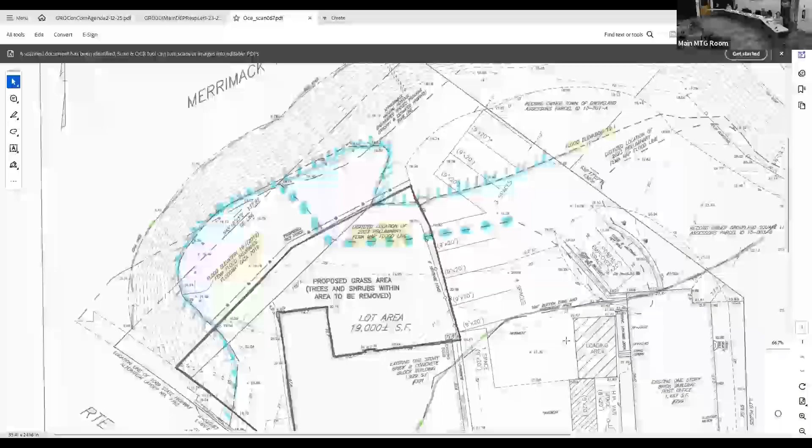So shown in red here is our area - sorry, I lost my cursor somewhere. The red area is the proposed area of trees and shrubs to be removed. This is part of our proposal to clear the area adjacent to the rear of the building and apply grass seed. We want to keep this open for access purposes and to allow sunshine to reach the building so it doesn't get all mossy.

With regard to our response to the DEP comment that the preliminary FEMA line should be applied to our plan, the dotted line here, cutting off this little triangle, was our original Zone A elevation at 19.1, and it just goes along the top of the bank there. When we digitized the Zone A from the preliminary FEMA plan, it did come up a bit further - you can see this blue dotted line, and it came up quite a bit.

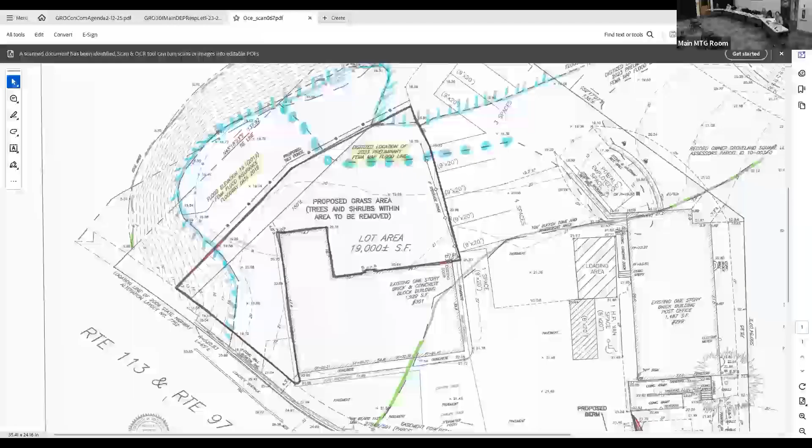That's the small triangle by the road there? Yeah, yes, this little triangle enclosed in red ink. Libby, could you describe that a little more? Because I'm pretty sure there's a handicap ramp right where that triangle meets the building. And is there a sidewalk there too? How do you plan to have a berm in those spaces?

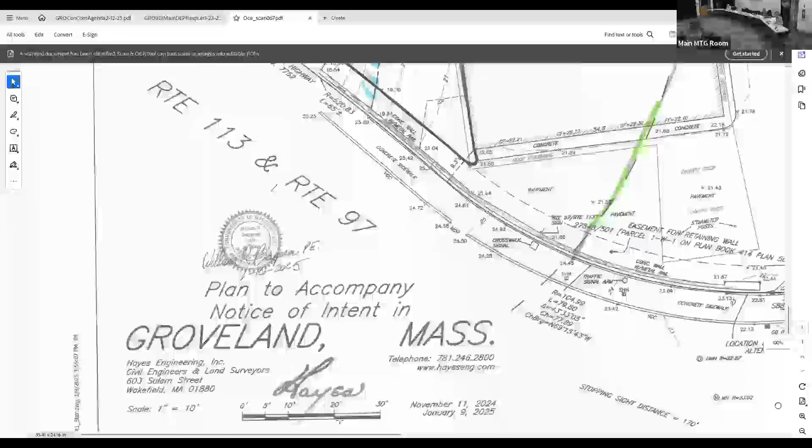See if we can focus in on it. So the area we're looking at, there's an area of gravel and grass just adjacent to the sidewalk. This is the sidewalk here next to the street. And then you have this little area of grass and stone that's adjacent to the flagpole. The ramp I think you're talking about is a little bit further in.

So I don't believe we're affecting that. It says concrete ramp there, but the entrance to that is where your cursor just was, to the right. So I'm pretty sure somebody coming from the parking lot to use the handicap ramp needs to go through that little stretch of gravel between the grass and the concrete ramp, where you have a little bit of berm there.

So I can clarify. What you have is a line that's been established by the DOT from the point of the handicap ramp out to the control joint in the sidewalk. They're suggesting a berm go in up to the sidewalk for the handicap ramp, which was 18 inches at the sidewalk by the street and goes to nothing at the ramp. So you're talking probably a distance of about 3 inches that would be impacted, if any, at the sidewalk. And I don't think the sidewalk will be affected at all.

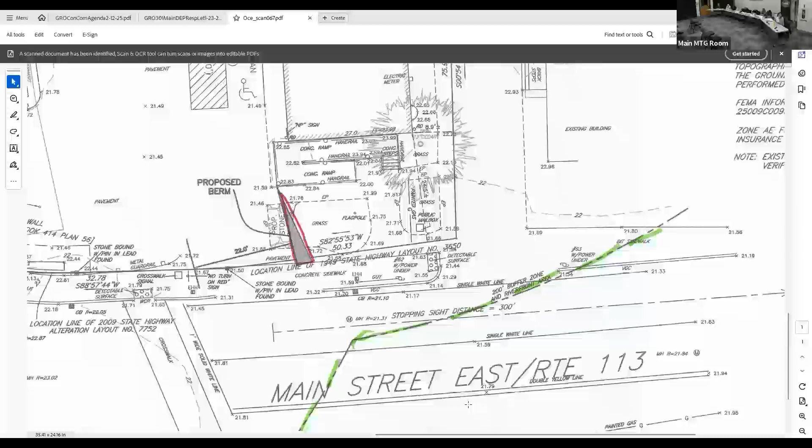So you did get a, I forget what it's called, a traffic study, you mean? Yeah, because I thought the DOT found this problematic last time. Yeah, but then they were supposed to apply for... let's see, where is it? We've got approval from the DOT, it's been submitted to the planning board, and it's been registered.

At the end of the day, we're wetlands and flood zone. I get you have a good point, they shouldn't screw it up, but if they mess up the handicap access, I would believe that would be a planning board issue. Maybe we could move the post office building then.

My only concern, and I brought this up last time, is whether water will flow differently if that berm catches it or something like that. That would be my question. Right, because it's all impervious.

Is it really a berm, or is it more just extending the parking lot? It's basically removing the grass and putting in a gravel type area for car traffic to go down, so they're not driving over the grass. It's just changing the line.

If you look at a picture on Google Maps, which is 5 years old, the grass basically doesn't grow for the first 2 feet on the edge of the driveway because people are driving over it. So my guess is they're not really doing a berm - in my mind a berm means some sort of elevation. That's what I was thinking, like a wheelchair trying to get over that. I don't think they're really - it seems like you're just hot topping, trying to do a separation point between the grass and pavement. Right, okay.

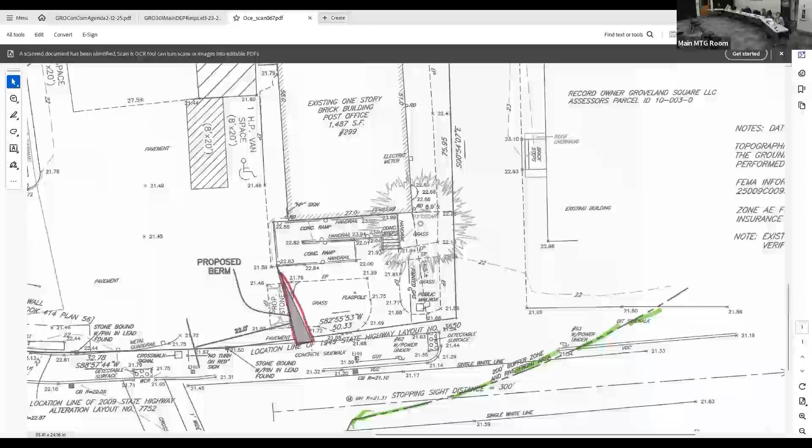Any other questions on this part of it from anybody? I apologize, I wasn't here at the last meeting - where's the north-south? On the northwesterly corner of the red area indicating where the grass is gonna be, in the back of the building, you have that extending over the riverbank. I assume you're not filling that, that's just an area to say here's the area we're cutting the shrubs and whatnot?

That's correct, we're cutting down the shrubs and saplings that are in there. What we discussed last time was that we wouldn't take out the entire trunk, but just cut it to the ground and leave the roots. Right, okay, thank you. And then when we put loam and seed on there, that'll be covered with a blanket or jute netting or something to stabilize it.

So we're actually putting loam on that slope, just enough to cover the stumps. How do we all feel about that? I feel like it's gonna end up in the river if it rains. They said they were gonna put a mat blanket down, so if it grows quick enough, it'll be stable-ish. That's a very steep slope there, though. It's practically a cliff.

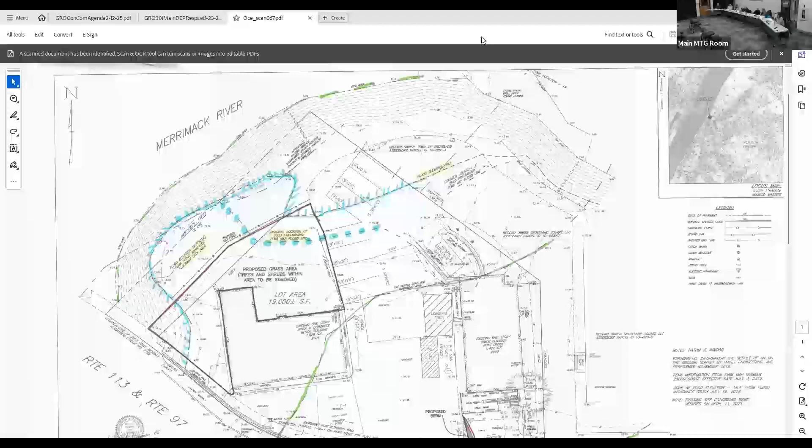They're Norway maples, we established last time. I did take a couple of videos that I sent to Libby, and I think she sent them in, that showed the week before the walkthrough was supposed to happen, showing where the old Mirafi barrier actually is and the area we're talking about. We're not changing grade or elevation, we're just trying to scratch it off, take down the saplings that are filtering up, get rid of the honeysuckle, the Japanese knotweed, the invasive stuff, and put some hydroseed down to keep it under control. Then the intent is to keep it mowed regularly and maintained so it doesn't come back again.

I would still like to go have a site visit personally. I don't know what a Mirafi barrier is. It's the old silt fence that was there from the last time - it's knocked down, laying on the ground, and it's pretty much the same perimeter we're dealing with at this point.

That's more than 5 years, isn't it? It's more than 5 years since this thing has been going on - no, since the silt fence was put up there, probably. It just feels like it's been a while. Well, that went up when the remediation was going on, right? I don't know whether it was done then or after that. That was done after that, Terry. The silt fence went up after the remediation? Yes. That seems backwards. No, the cleanup took place about 10 or 12 years ago. Yeah, I guess that's what I'm thinking of. That was all just once they took the tanks out, then it was inside the buildings, they had the pipes. Anyway, we're drifting.

So the problem is the snow on the ground. All we can do is schedule something before our next meeting, which I'd propose as late as possible, Saturday March 8th, and hopefully the snow will clear because right now you can't really see it, and it's difficult to get an idea. I don't know if you saw the video - it's fine, but it doesn't really give you the bigger picture of the site and the steepness of the bank, which I'd like to see. So I'd propose we schedule a site visit for Saturday, March 8th.

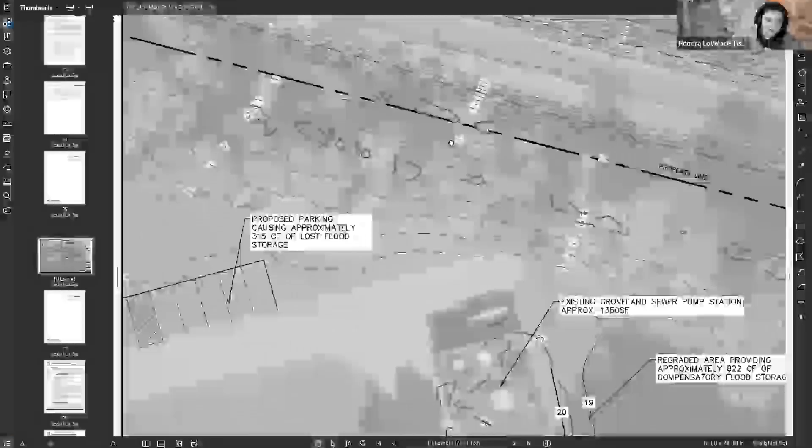Where's that map? Here it is. So here is where the regrading of the area right here would just increase the flood storage back here, so not just doing a big ditch, but just kind of smoothing some of this down. Yeah, it's pretty swampy back there. When they mow, there are times after rains where you can see 4-inch deep tire tracks from the lawnmower.

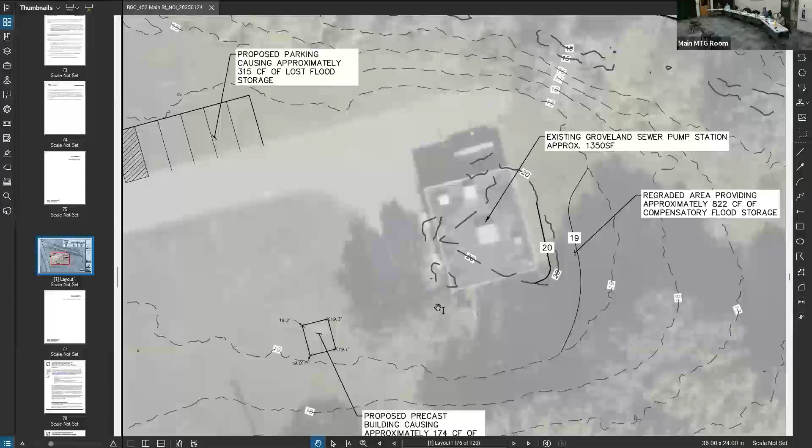You're saying out in front? No, in the back. Oh, the back is almost wetland. How close is it to our BVW? So Terry, taking a look at that, where that parking lot is, don't you think that's kind of in that swampy area, or the wet area where the grass is? You mean where the proposed parking is? Yes. No, that's actually the driest area in the whole site, I think that's on the other side. The really wet stuff is back in this area.

I would imagine back where this is, because there's the wetland line around here, so back here, right this area. Right there, if you go there your feet will sink in mud into your boots, as do the lawnmowers. So I've actually worked with the town to allow some of that to regrow to natural area, because there's just no point in trying to grow grass there.

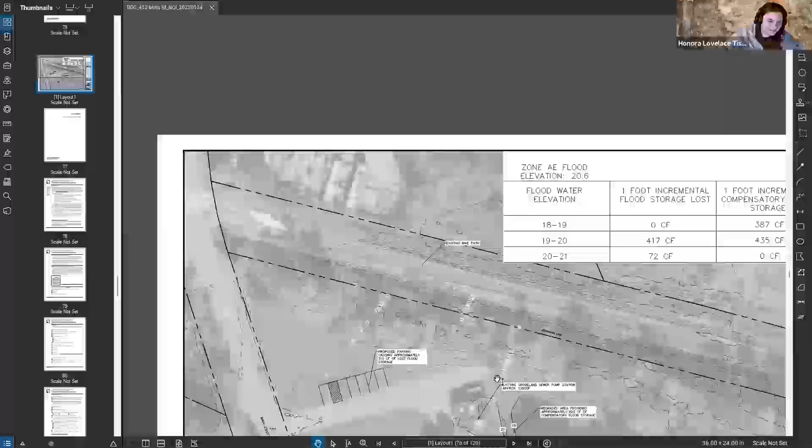So let me move back to that mapping. Oh, there are too many pages. Okay, here we go. So here, at the top, it shows the flood elevation of what is being lost. So we can see here that the flood elevation here is 20.6 feet. This line right here is the 19-foot elevation line, so let me zoom in a little bit more.

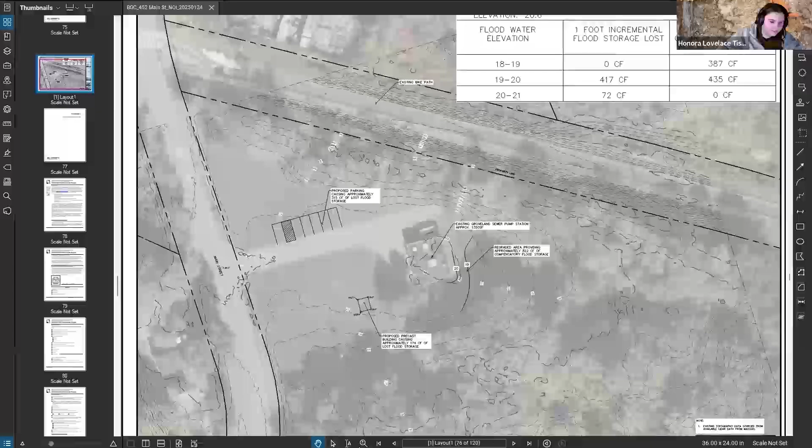So we're in that 19 feet for both the parking lot and the building, or the pad really. And so the proposal here is where the current 19-foot is behind the building, kind of just moving that up a bit, and this will increase flood storage by 822 cubic feet to account for the loss of about a little over 489 cubic feet. So between the parking spaces, which are 315 cubic feet of lost flood storage, and the building, which was 174, this grading just right here along, just moving this elevation line from here up does 822 cubic feet.

So I know that there was flood storage proposed in different areas. This is what was presented and approved by the water department. And then you said you're paving those parking spaces? Yes, they will be paved.

It's close to where the depression, the swampiest area is. The wettest stuff is right here, and they're looking at that, so it's close. Part of it's going to be in the 25-foot BVW buffer too. It's too bad the wetland line isn't on the map we're looking at right now.

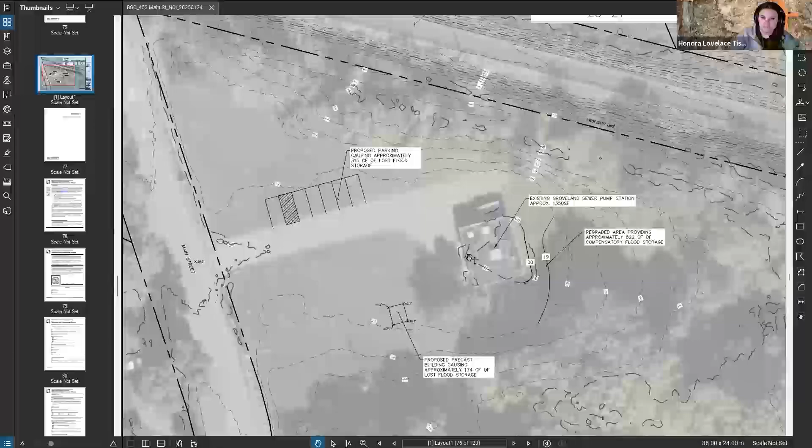No work is within 25 feet of the BVW - I think they arranged for it to just be outside of that. It's just outside of it. I believe it just misses by probably 5 to 10 feet, on the wetland side, but not the Argilla Brook side. Work is within the 200-foot buffer zone of Argilla Brook, but none of the work is within 25 feet of the brook.

Do you, and forgive me if I missed this, propose any sort of silt fencing or anything for this work? Or do you think the piping and stuff will all be done in one day, backfilled, and then a day or two later you'll hot-top it?

Yes, there will be erosion controls in place before any work is done. In terms of trenching, it is usually open during the day and closed at night. There will be some erosion controls while they're working, and everything will be closed, only open while work is happening.